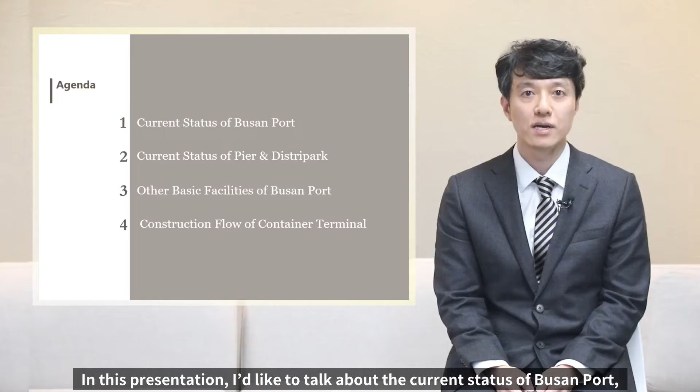In this presentation, I'd like to talk about the current state of Busan Port, the current status of pier and Distripark, other basic port facilities of Busan Port, and the construction flow of container terminals.

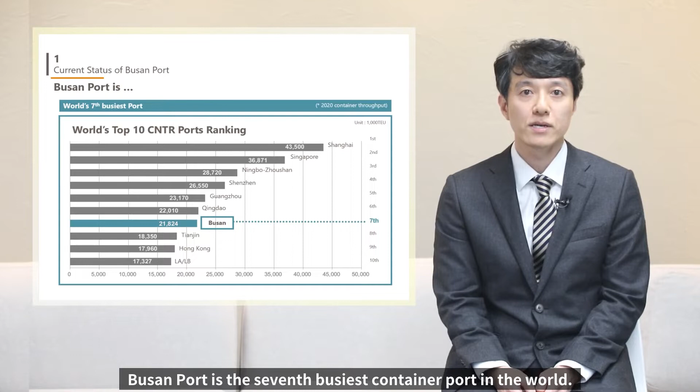Busan Port is the 7th busiest container port in the world. It handled about 22 million TEUs of containers in 2020, following Shanghai, Singapore, Ningbo, Shenzhen, Guangzhou, and Qingdao.

Busan Port is the largest and busiest port in Korea. Of the total 29 million TEUs of containers handled in Korea annually, 22 million TEUs, over 75%, are handled at Busan Port.

Incheon Port and Gwangyang Port follow Busan Port. Busan Port has 2 ports, the Old Port and the New Port.

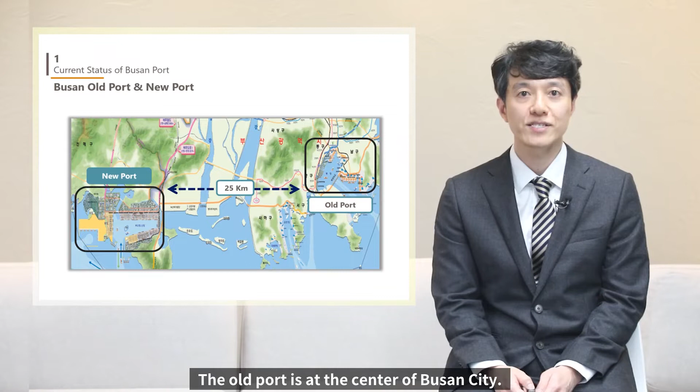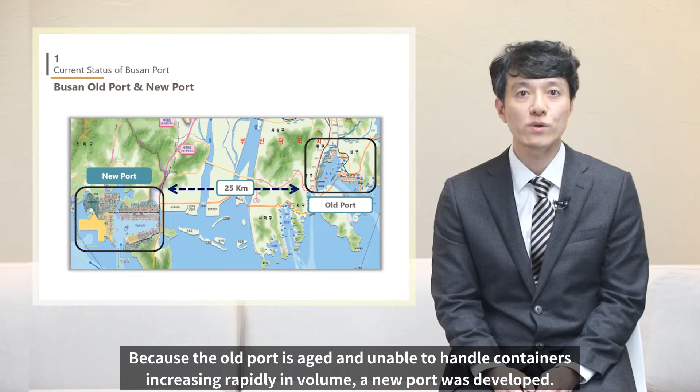The Old Port is at the center of Busan City. Because the Old Port is aged and unable to handle containers increasing rapidly in volume, a new port was developed. The new port is 25 kilometers away from the old port.

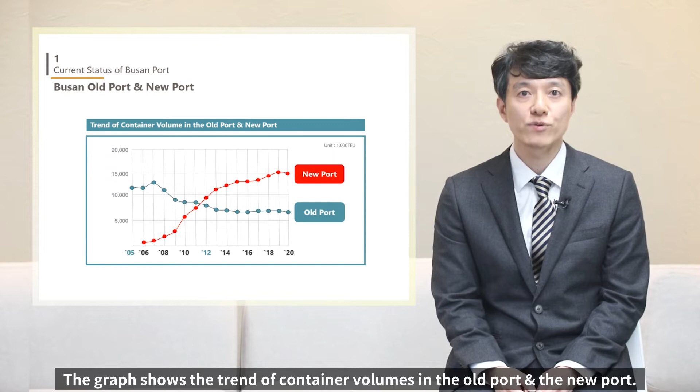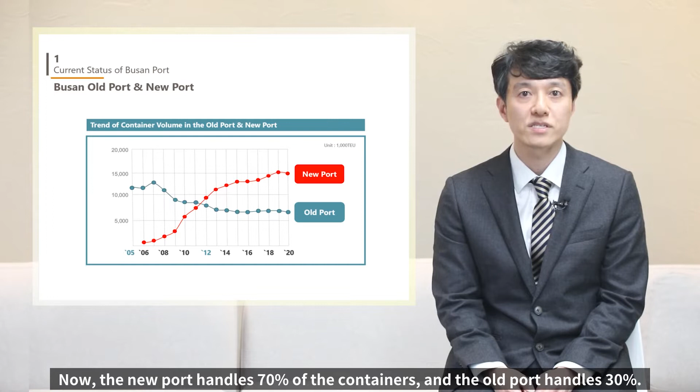The graph shows the trend of container volumes in the old port and new port. In 2005, all containers were handled in the old port. However, as the new port opened in 2006, the volume handled by the new port increased rapidly. In 2012, six years after the opening of the new port, the volume handled by the new port surpassed that of the old port. Now, the new port handles 70% of containers, and the old port handles 30%.

Now, Busan Port handled about 22 million TEUs in 2020. It is the busiest and largest port in Korea, the 7th busiest container port in the world, and the 2nd busiest transshipment container port in the world.

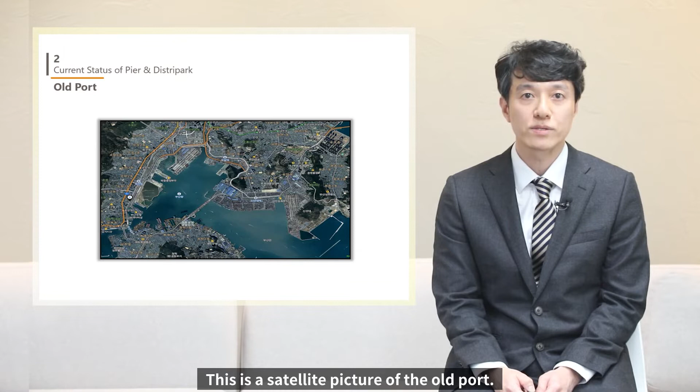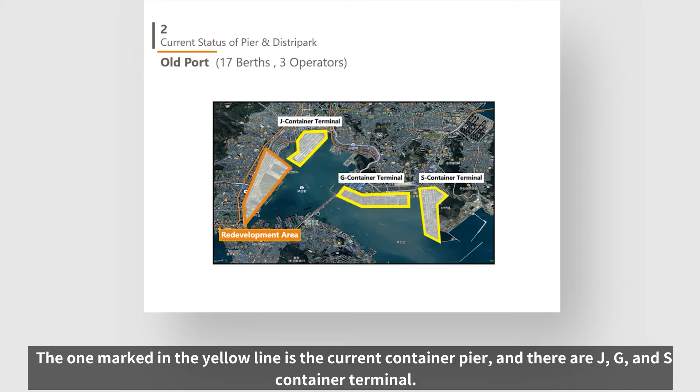Next, I'd like to talk about the current status of pier and Distripark. This is a satellite picture of the old port. The orange line is the redevelopment project area. The one marked in yellow is the current container pier, with J, G, and S container terminals. A total of 17 container ships can be docked at the same time in the old port.

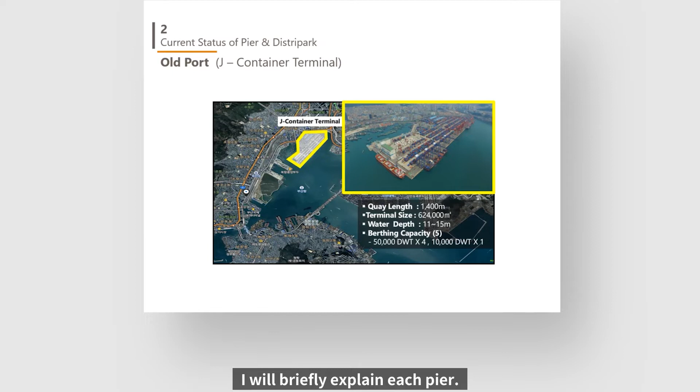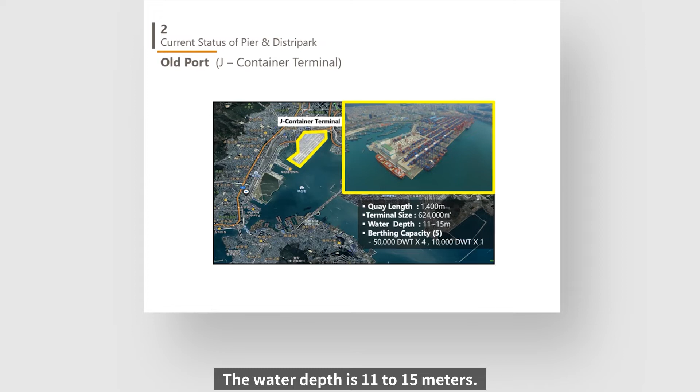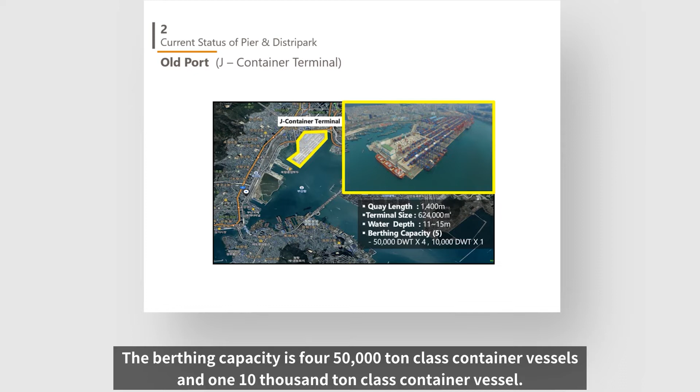I will briefly explain each pier. J container terminal: the quay length of the terminal is 1,400 meters. The water depth is 11 to 15 meters. The berthing capacity is four 50,000 ton class container vessels and one 10,000 ton class container vessel.

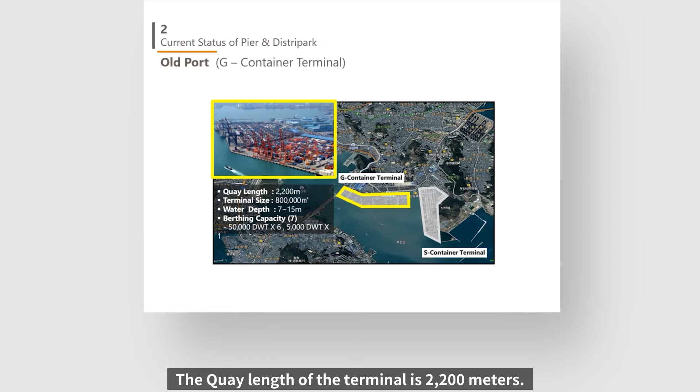G container terminal: the quay length of the terminal is 2,200 meters. The berthing capacity is 6 50,000 ton class container vessels and one 5,000 ton class container vessel.

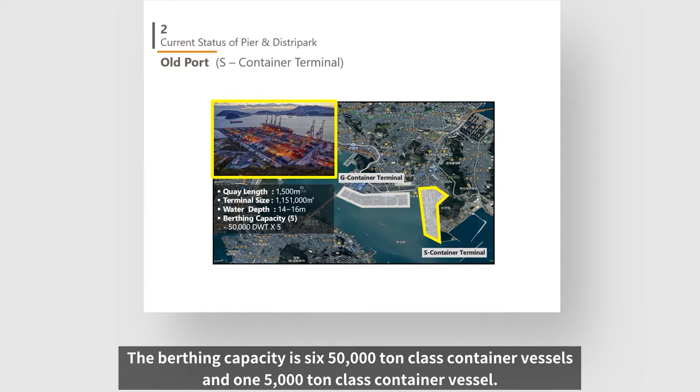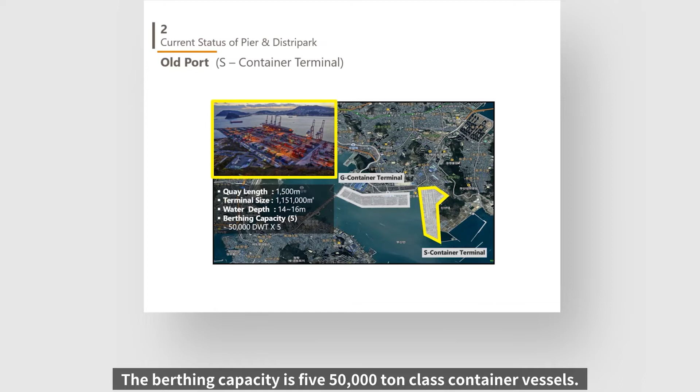S container terminal: the quay length is 1,500 meters. The berthing capacity is 5 50,000-ton class container vessels. This is a satellite picture of the new port.

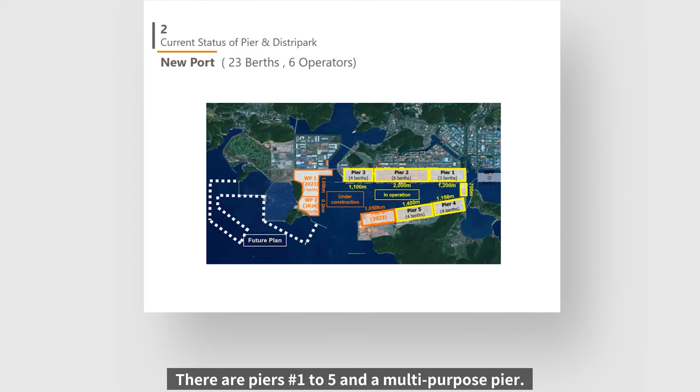The yellow line is the pier currently in operation. There are pier number 1 to 5, and a multipurpose pier. The orange line is under construction. The dotted line is a future planned area to be built by 2040.

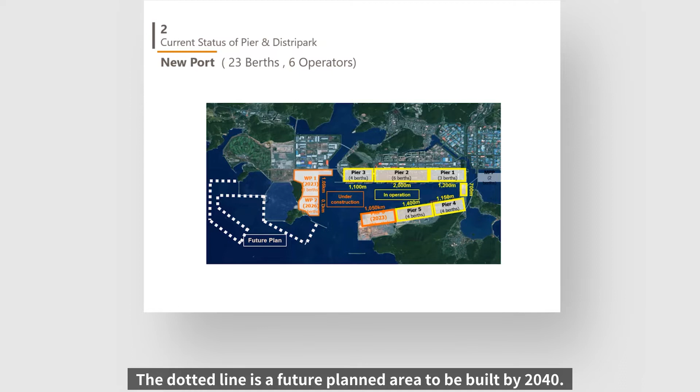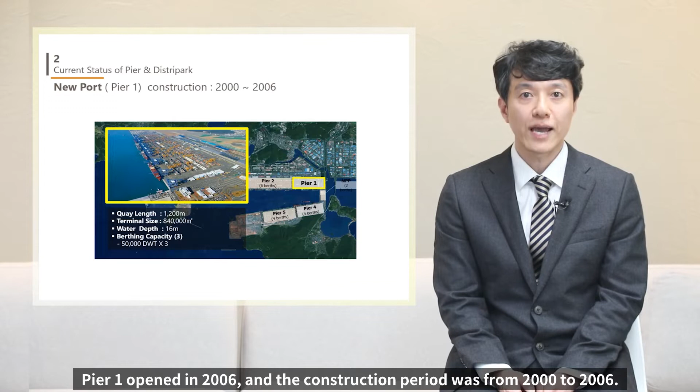I will briefly explain each pier. Pier 1 opened in 2006, and the construction period was 2000 to 2006. The berthing capacity is 3 50,000-ton class container vessels.

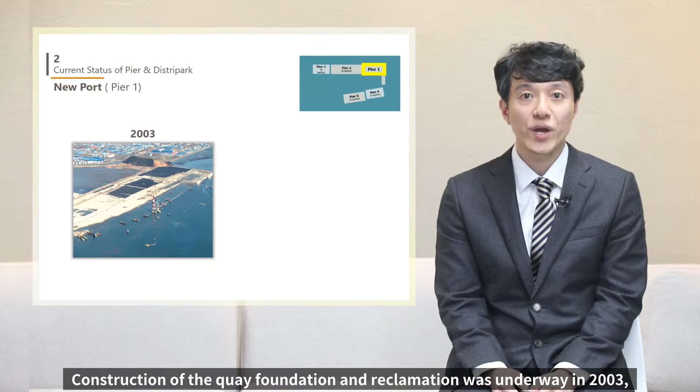Construction of the quay foundation and reclamation was underway in 2003, and embankment soil work was underway in 2004. In 2005, asphalt pavement work was completed in some areas. In 2006, you can see the quay crane, transfer crane, and also containers in the storage yard.

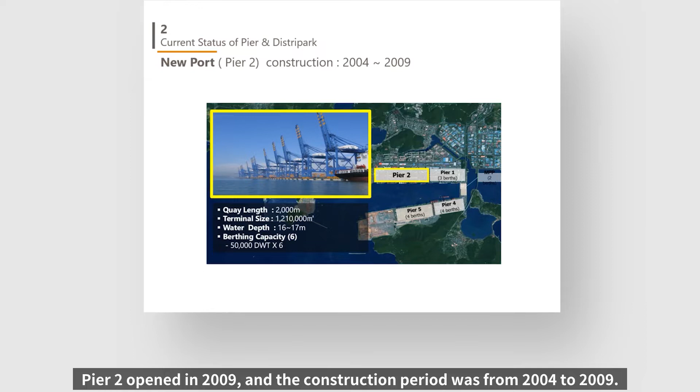Pier 2 opened in 2009, and the construction period was from 2004 to 2009. The berthing capacity is 6 50,000-ton class container vessels.

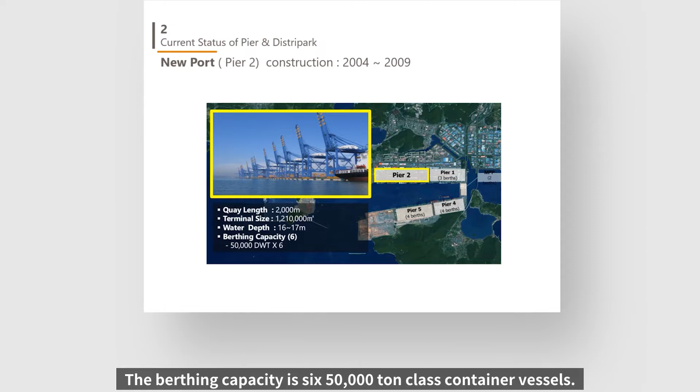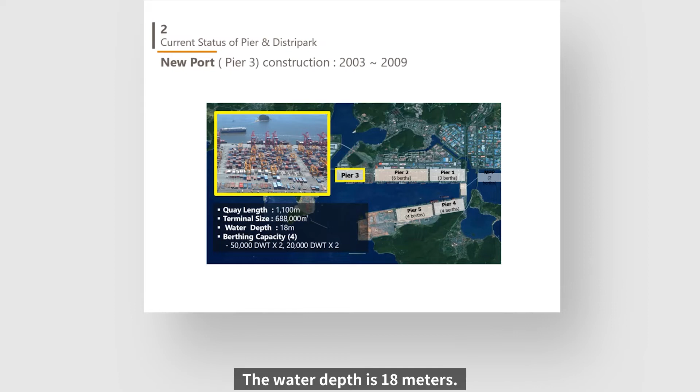Pier 3 opened in 2009, and the construction period was 2003 to 2009. The water depth is 18 meters. The site was built by blasting the rocky area of the mountain, and construction of the quay foundation was also underway in 2005.

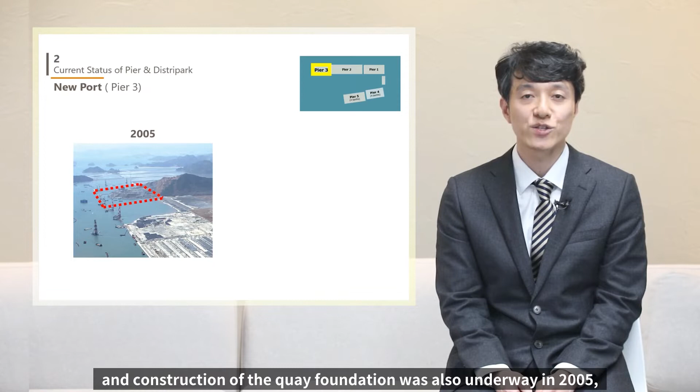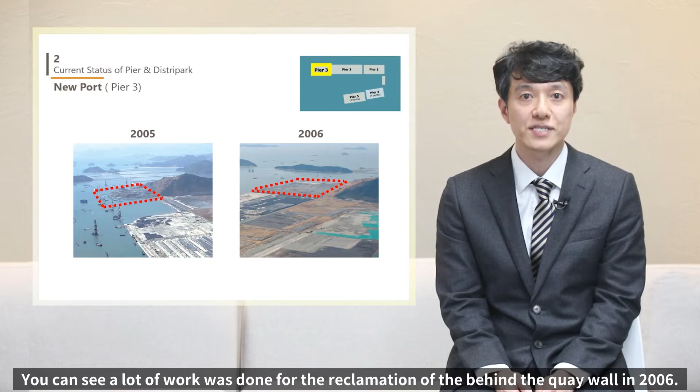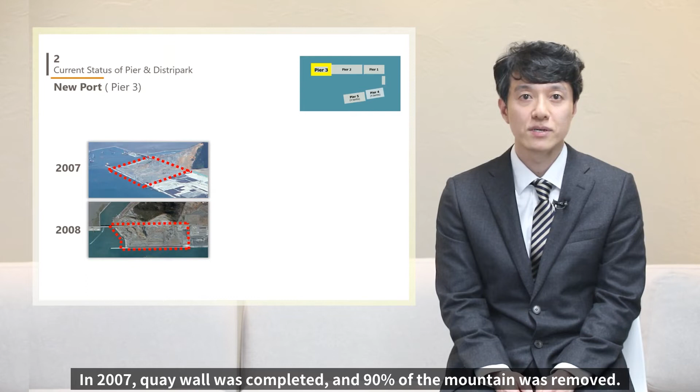Pier 4: the construction period was from 2004 to 2009. The water depth is 17 meters.

Pier 5 opened in 2011, and the construction period was from 2007 to 2011. The water depth is 17 meters. Pier 5 is only a vertical yard system.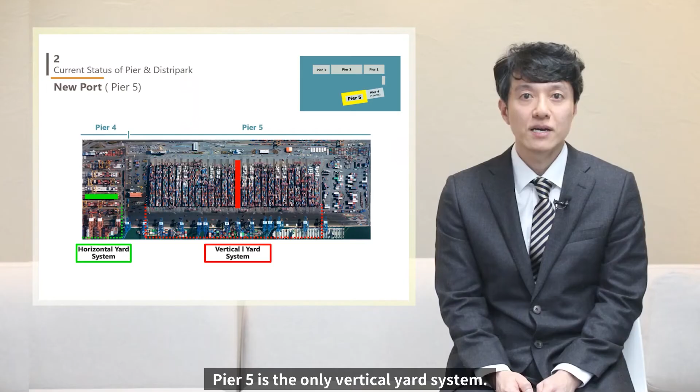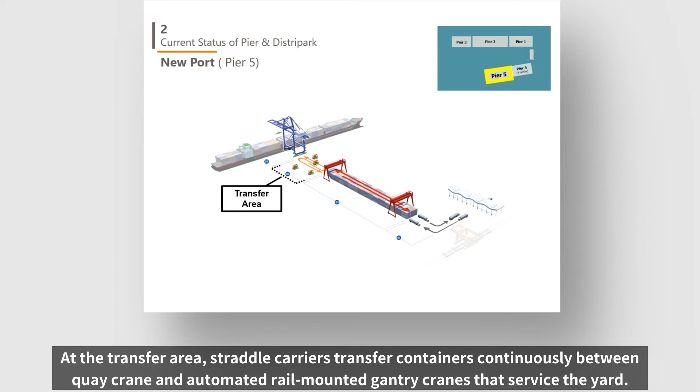World-renowned terminals, such as Rotterdam ECT of Netherlands, Hamburg CTA of Germany, and Norfolk APM of USA, also introduced the vertical yard system. At the transfer area, straddle carriers transfer containers continuously between the quay crane and automated rail-mounted gantry cranes that service the yard. At the automated stacking area, a fully automated rail-mounted gantry crane yard has zero trucks or people. It operates 24/7.

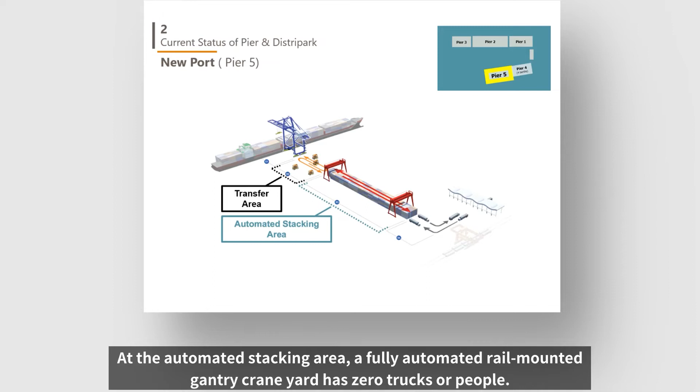Now, I will move on to Distripark. The area marked with a red line is North Distripark, which is completely constructed. All the area in the Distripark was leased to about 30 multinational logistics companies.

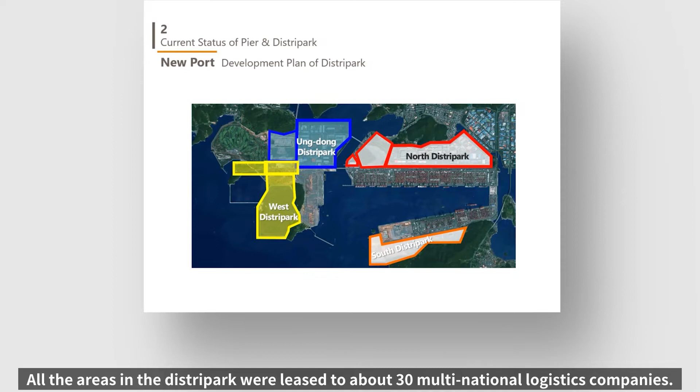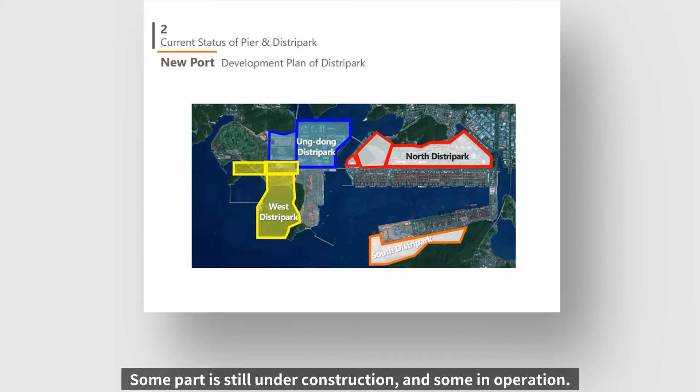They mainly use the space for storing, assembling, packing, and labeling goods. The area marked with the blue line is Ung-dong Distripark. Some part is still under construction, and some is in operation.

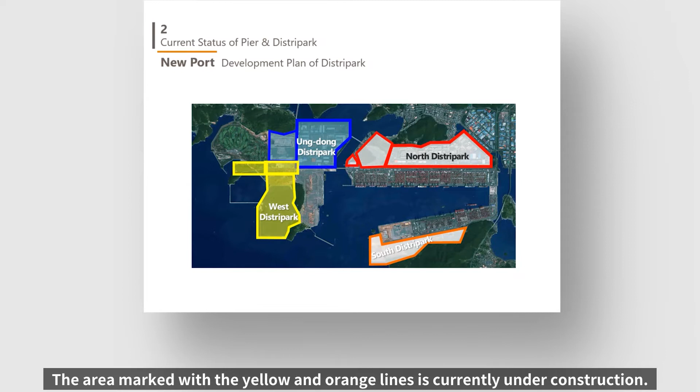About 40 logistics companies are operating there. The area marked with the yellow and orange line is currently under construction.

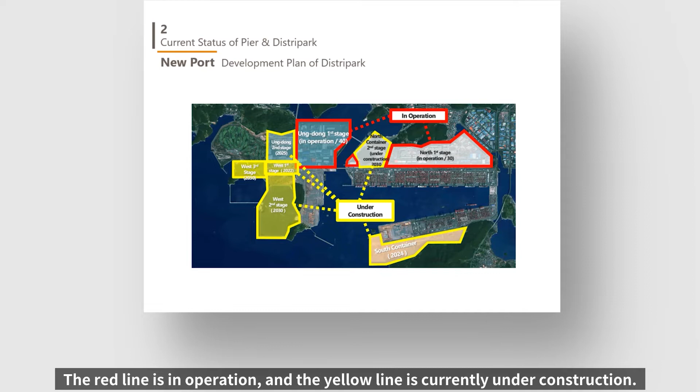The red line is in operation, and the yellow line is currently under construction. The total area of the four Distriparks is about 8.5 million square meters.

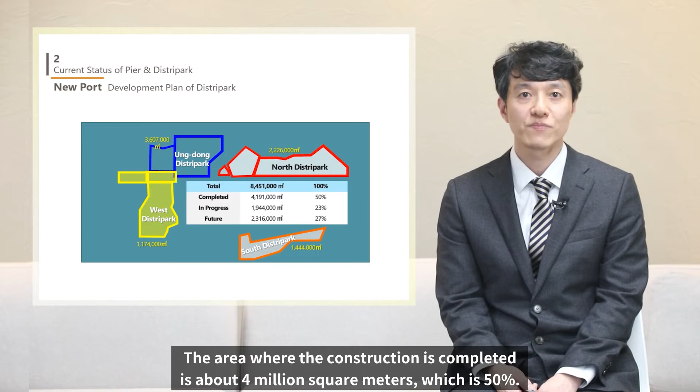The area where construction is completed is about 4 million square meters, which is 50%. Well, this is the end of part 1.

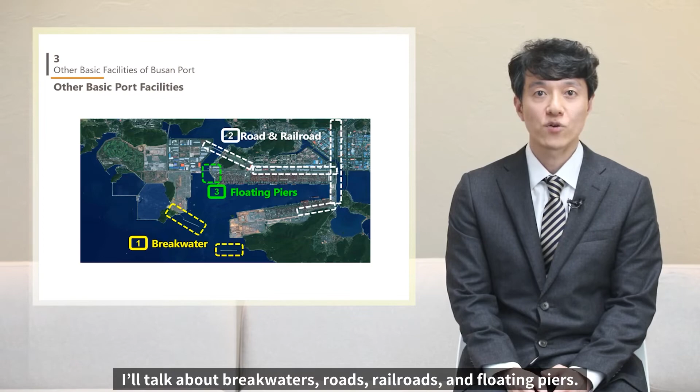Let's start part 2. Next, I'd like to explain basic port facilities other than the pier and Distripark. I will talk about breakwater, roads, rail roads, and floating piers. Let me explain breakwater first.

Then reclamation by dropping riprap, armor stone work, formwork, and placing concrete, and making, moving, and installing tetrapods are necessary to make a breakwater.

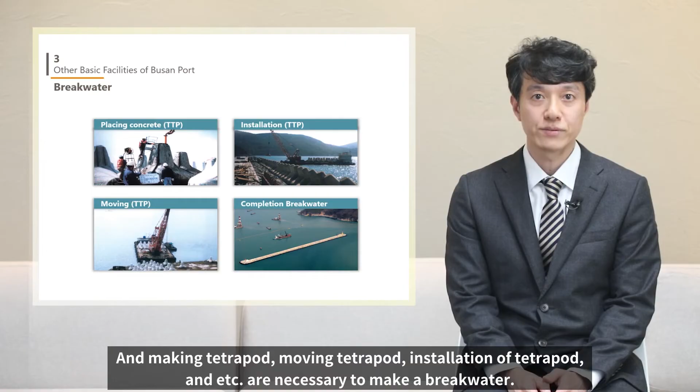Next, the road and railroad. Various and many works are required to build roads and railroads.

Lastly, in this chapter, I would like to explain how a container terminal is made. It's divided into 10 steps.

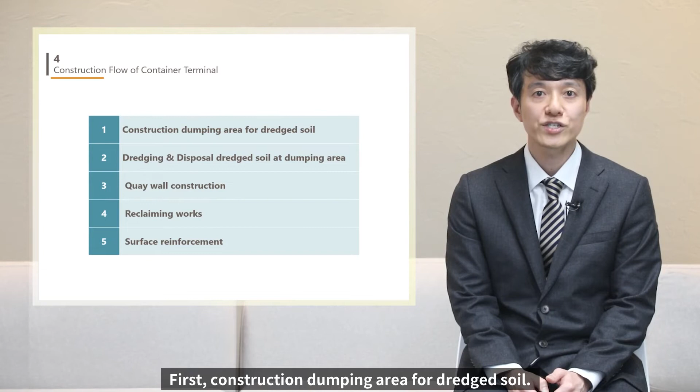First, construction of the dumping area for dredged soil. Second, the dredging disposal of dredged soil at the dumping area. Third, quay-wall construction.

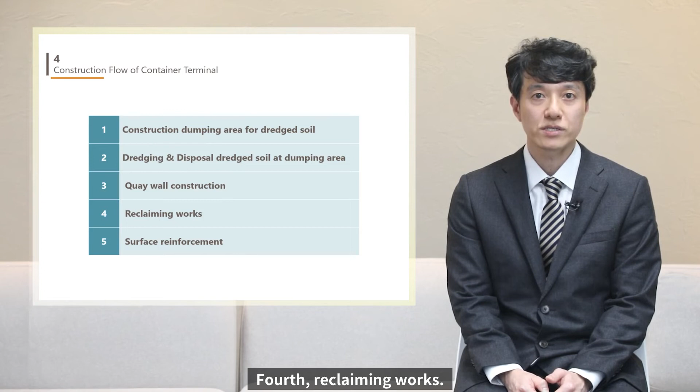Fourth, reclaiming works. Fifth, surface reinforcement. Sixth, soft ground improvement. Seventh, surcharge preloading.

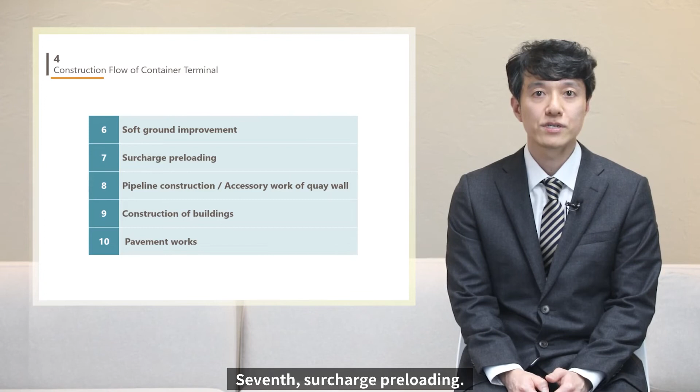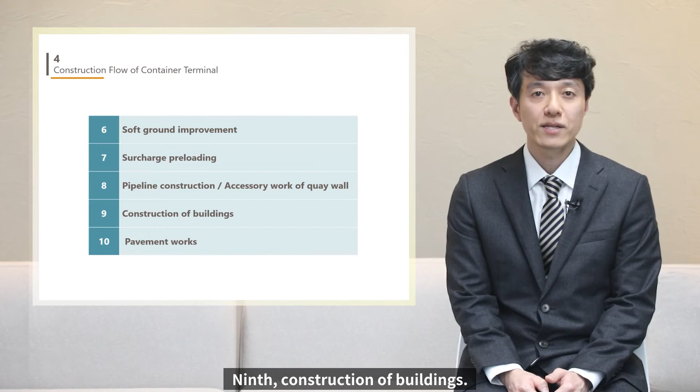Eighth, pipeline construction, an accessory work of the quay wall. Ninth, construction of buildings. Tenth, pavement works.

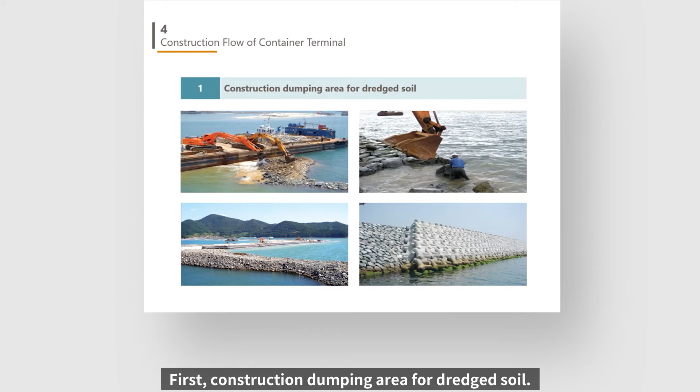And I will briefly explain each step. First, construction of the dumping area for dredged soil is a facility designed to facilitate the disposal of the seabed soil produced in the course of dredging.

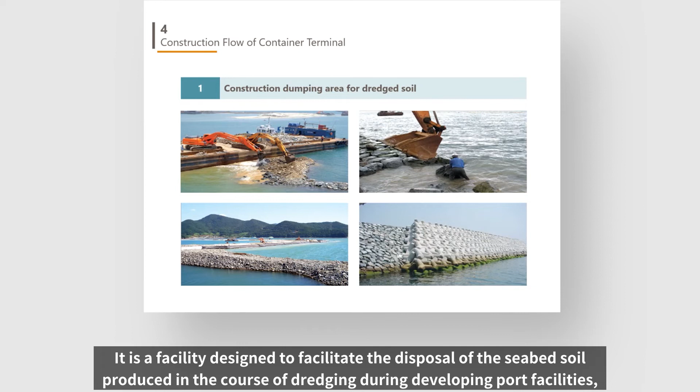This occurs during developing port facilities such as berths, seaways, and foundations of various port structures. When dredged soil dumping is completed, the dumping area can be used as a container terminal site.

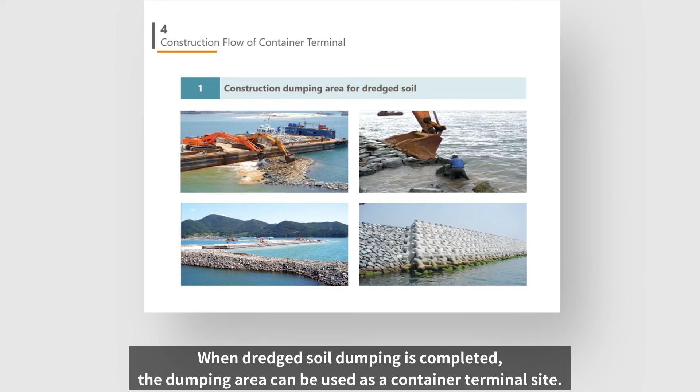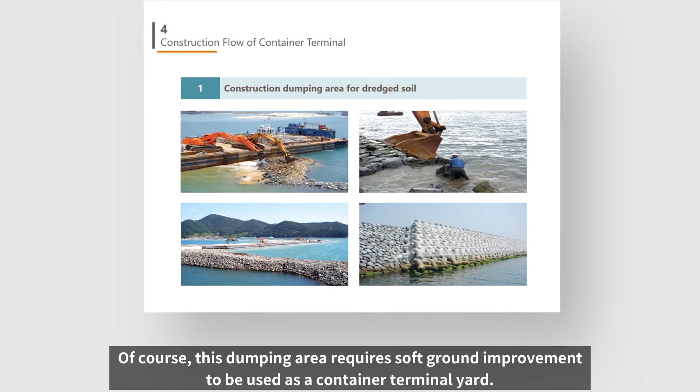Of course, this dumping area requires soft ground improvement to be used as a container terminal yard. However, thanks to the dumping area, reclamation costs can be reduced, enabling economical construction.

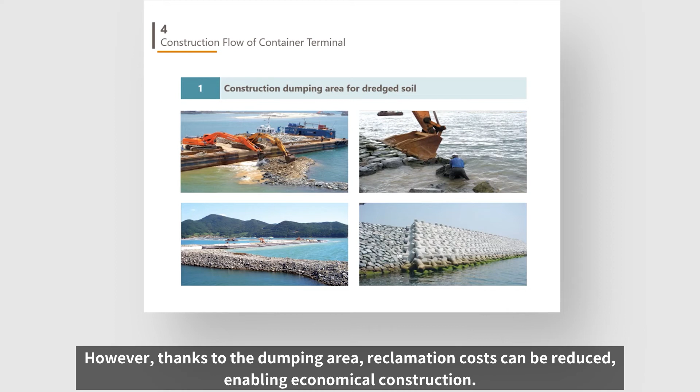On the screen, you can see the dropping of riprap, making of the dike, placing of armor stone, and laying of tetrapods in order.

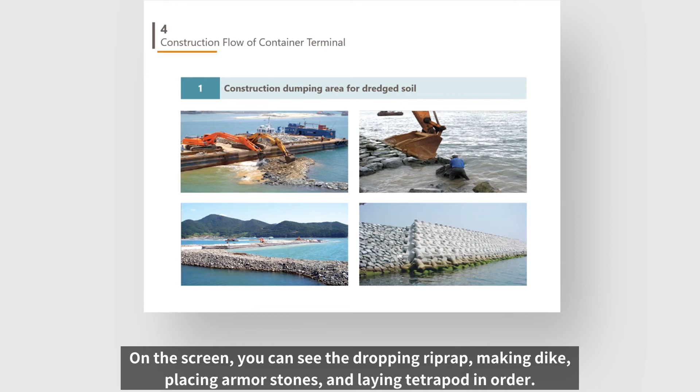Second, dredging and disposal of dredged soil at the dumping area. Once the construction of the dumping area is completed, it would be possible to dump the dredged soil at the dumping area.

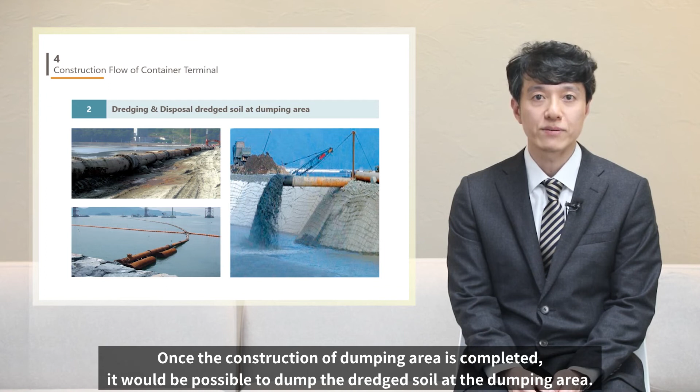The pictures on the left show the discharge pipe on land and in the sea. The picture on the right shows dumping of dredged soil.

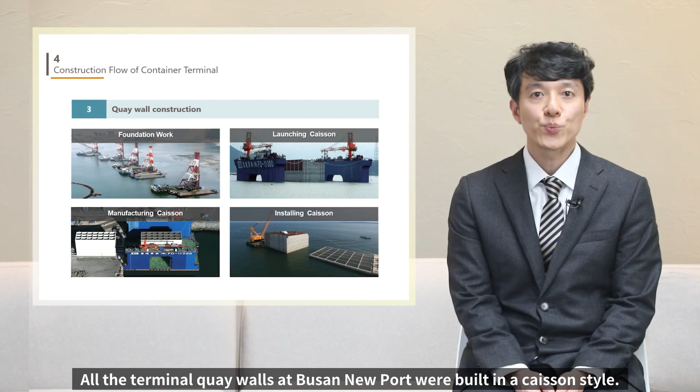Third, quay wall construction. All the terminal quay walls at Busan New Port were built in a caisson style, so I'd like to explain in terms of caisson type quay wall.

As you can see on the screen, quay wall foundation work, manufacturing work, launching, and installing the caisson are required for construction of the quay wall.

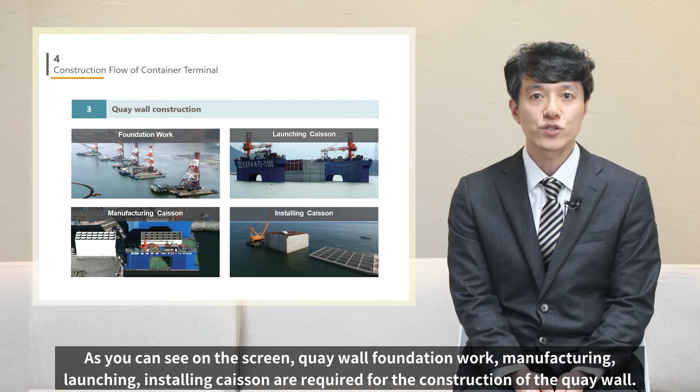I'd like to show you a short video to help you understand the caisson installation. It will take 1 minute.

Load the floating dock with the caisson, and move to the designated area.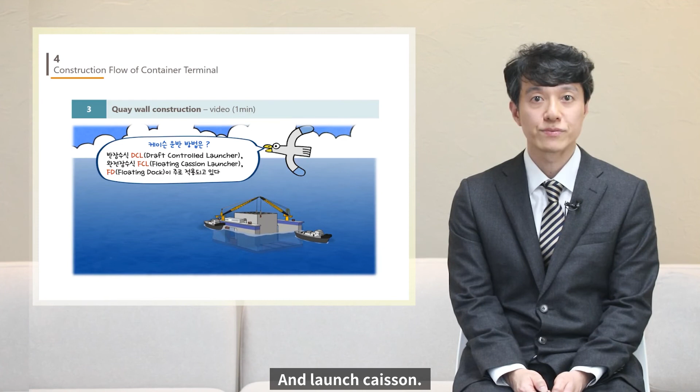Launch the caisson, and move the caisson by tugboat.

Work with the temporarily placed caisson, and finally, install the caisson.

Reclaiming works. As you can see on the screen, reclamation at the rear of the quay wall proceeds after the caisson installation is completed.

Surface reinforcement. When the reclamation work is completed, the soft ground needs to be improved to create a solid ground.

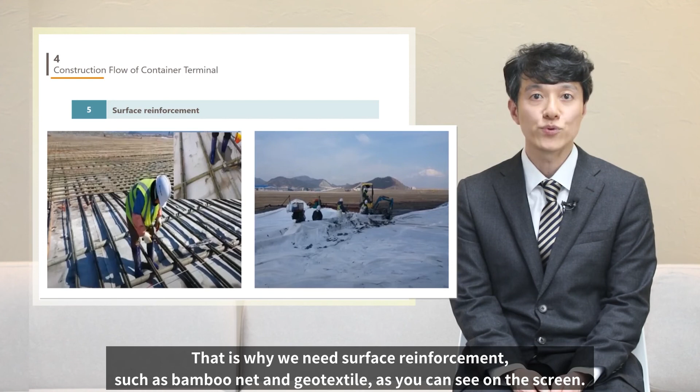In order to improve the soft ground, heavy construction equipment is required to enter there. That is why we need surface reinforcement such as bamboo net and geotextile, as you can see on the screen.

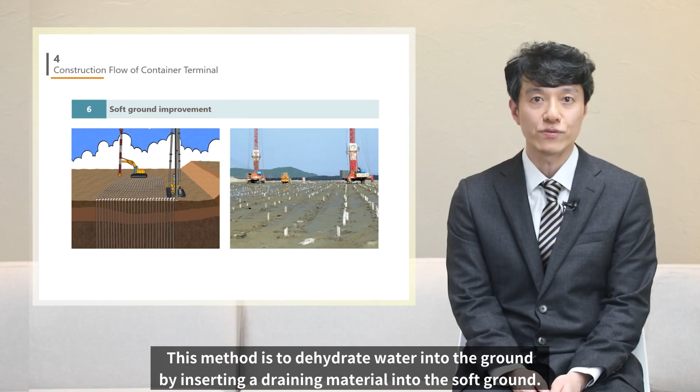Soft ground improvement. This method is to dehydrate water into the ground by inserting draining material into the soft ground. You can see on the screen the white drain material being inserted vertically by force in order to dehydrate water in the soft ground.

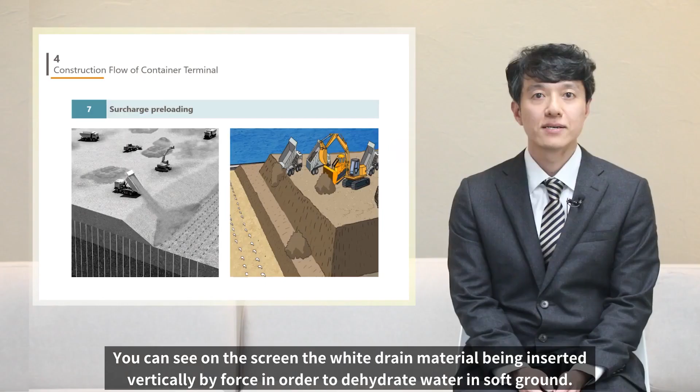Surcharge preloading. In order to accelerate dehydrating water in the ground, surcharge preloading work is carried out after inserting draining material into the soft ground.

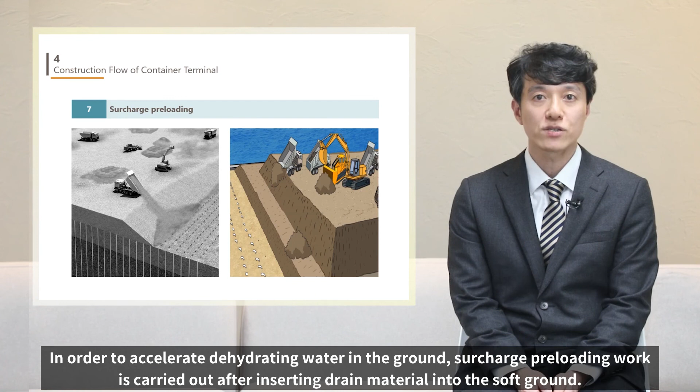After leaving embankment soil for 6 months to 1 year, the soil is removed.

Pipeline construction, auxiliary work of the quay wall. Various pipelines such as sewage, water, electric, communication, and gas pipe are laid on the ground.

And the accessory facilities of a quay wall such as mooring post, fenders, and car stoppers are separately constructed, as you can see in the pictures on the right.

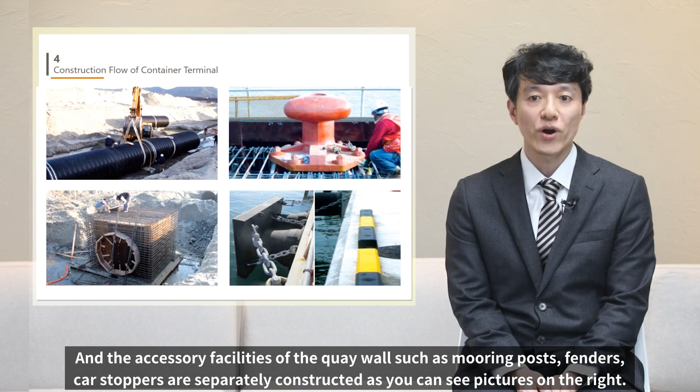Construction of buildings. Buildings for various purposes are constructed.

Pavement works. Asphalt concrete pavement or cement concrete pavement are decided considering on-site conditions, economic feasibility, and maintenance. In case of the stacking area, crushed stone pavement may be constructed as necessary.

And so, we have completed the beautiful container terminals. That's all for my presentation about Busan port development. Thank you.